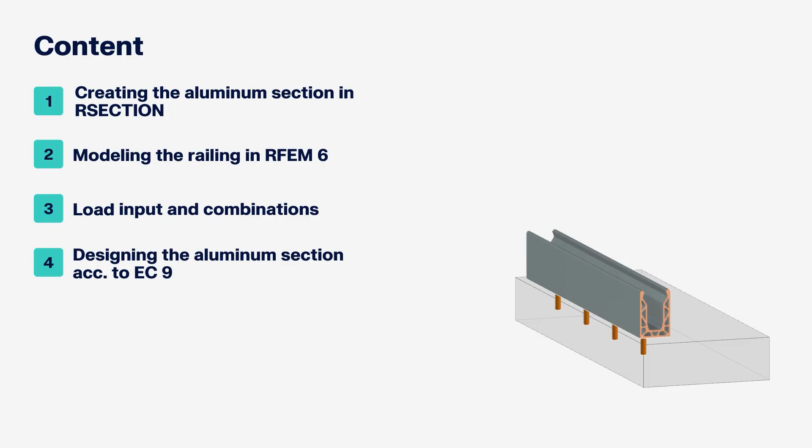The focus is on an aluminum base profile. This profile is anchored to a supporting surface with screws. The glass panel is fixed in place using clamps within the base profile. Step by step, I will demonstrate how to model the system in RSECTION and RFEM and how to design it using the Aluminum Design add-on.

I'll compare two different modeling approaches, one using members and the other using surfaces. The goal is not only to show you how the software works, but also to highlight how the modeling approach influences the structural behavior and ultimately the design results.

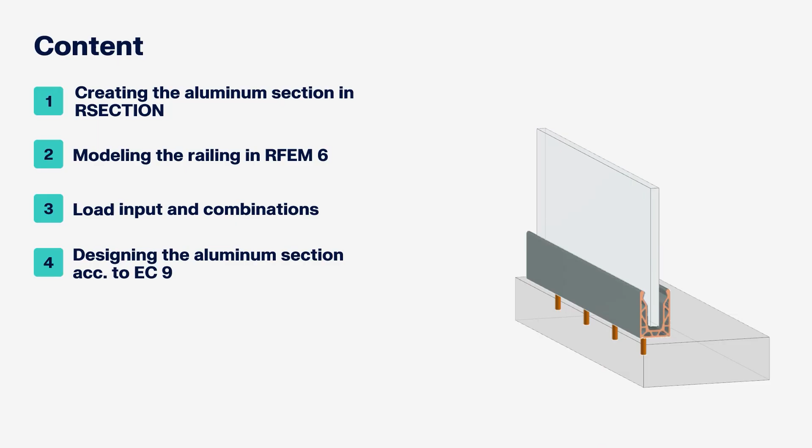Cross-sections in RSECTION can be created in various ways: via graphical or tabular input, by importing a DXF file, using a script, or the API. In this webinar, I will show how to create a cross-section using a DXF file. To do so, I open the import dialog via import DXF, and then I choose the corresponding DXF file.

Three import methods are available, with the create DXF template for further editing. The lines in the DXF file are imported as simple lines. These can be used as modeling aids. The other import options automatically generate elements. These are required for section classification, effective cross-section calculation, and thin-walled analysis. They are also necessary if the section will later be converted to a surface model in RFEM, as only elements are converted into surfaces. The surface thickness corresponds to the element thickness.

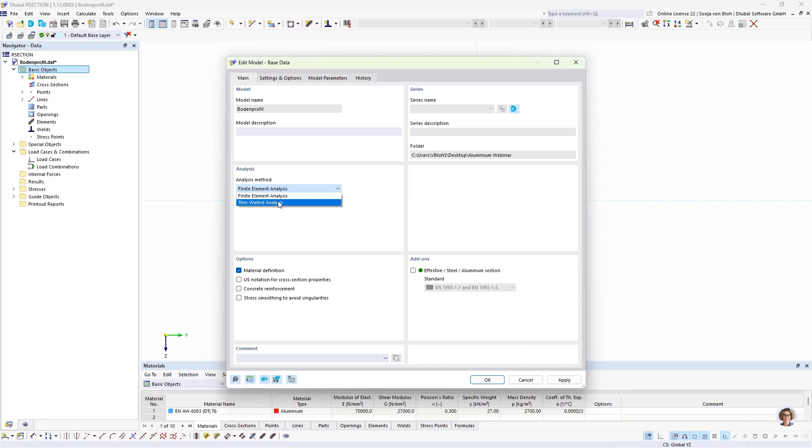In the base data, I select the analysis method. Two options are available: finite element analysis and thin-walled analysis. I opt for finite element analysis.

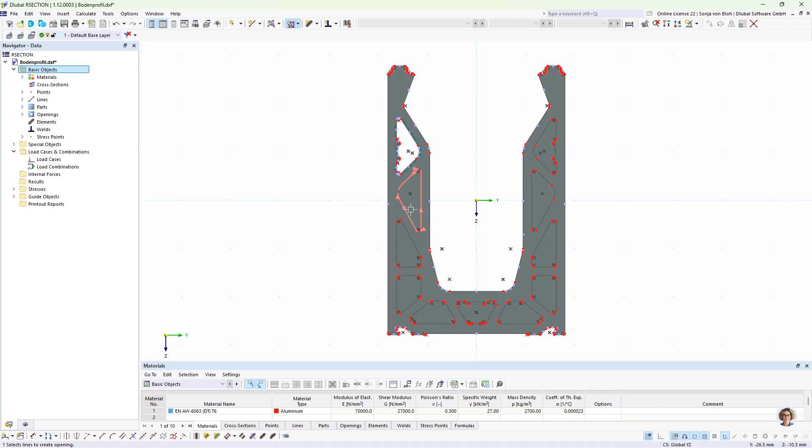Next, I create the part which is required for all analysis methods in RSECTION. Using the select boundary function, I select an outer contour of the cross-section, and then the part is generated automatically. I then define an opening using also the select boundary function, and then I click on the corresponding lines to create the openings.

To improve clarity, I hide the parts and the openings in the display navigator.

Next, I create elements. This is necessary for cross-section classification and to use the conversion to surfaces. Since the section is symmetrical about the z-axis, I model only half of it and create the other half using mirror. I generate elements with the function create center elements between parallel lines. Only two parallel lines need to be selected, and then the element is created automatically. Its thickness is derived from the spacing between the lines. I will do this for all elements now.

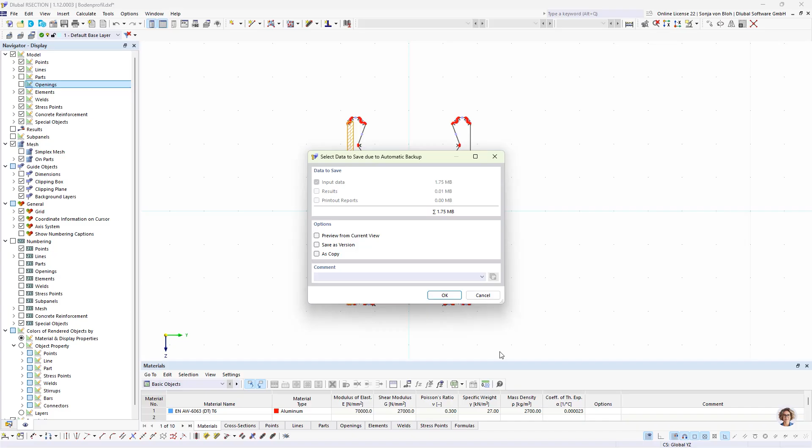Afterwards, I extend the horizontal and vertical elements on both sides. For this, I select first the horizontal elements and then the vertical elements, and I use the function to next line or element. Here I extend both element sides. I do the same for the diagonal elements, selecting first the elements which I want to extend.

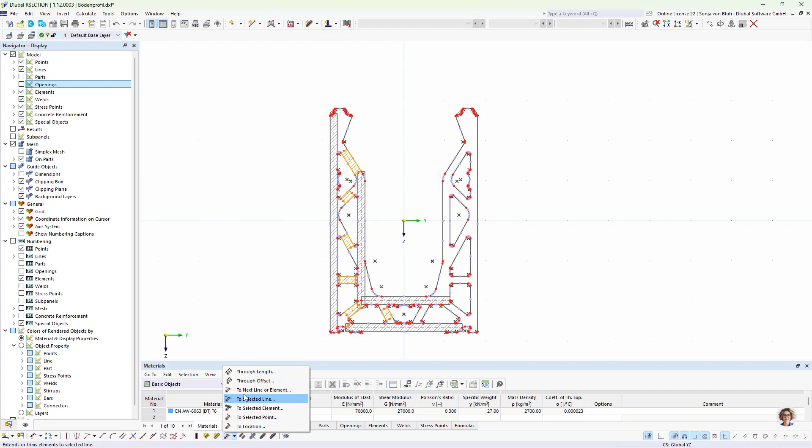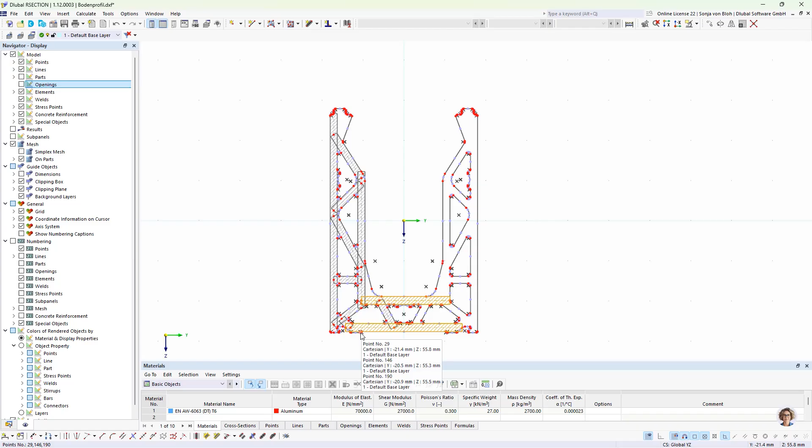And then I choose again this function to next line or element, and I modify both element sides. Since I only want to model half the profile, I shorten the horizontal elements, by setting the y coordinate of the 2 points that you see here to the 0 point.

The elements are not yet connected. To do this, I use the connected lines and elements function, and I select the entire cross-section using a selection window. I delete 2 redundant elements, here this element, this. Then I select all elements.

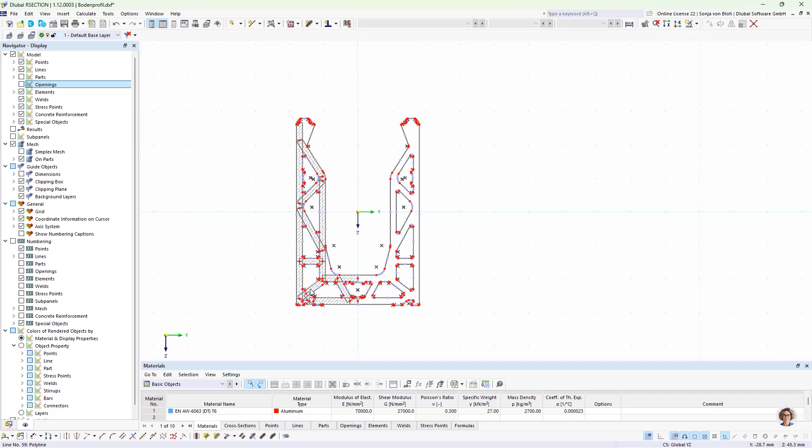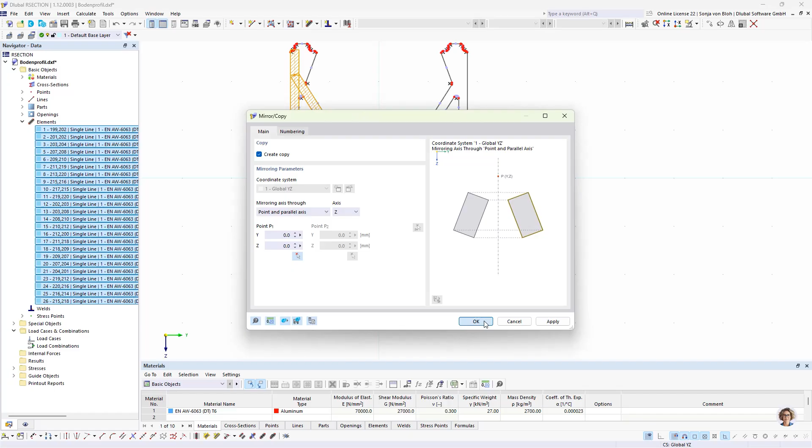And choose now the mirror function. I want to create a copy. Mirroring axis is the z-axis and the point is the 0 point. Now the cross-section is complete, so I can save this cross-section.

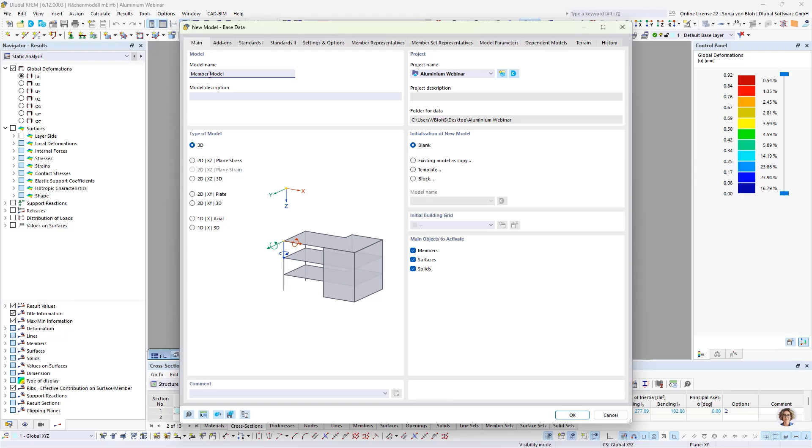And then I move on to modeling the railing in RFEM. First, I show the creation of the base profile as a member with a glass pane rigidly attached. I create a new model via File, New, and I name this model Member Model. I select the type of model 3D.

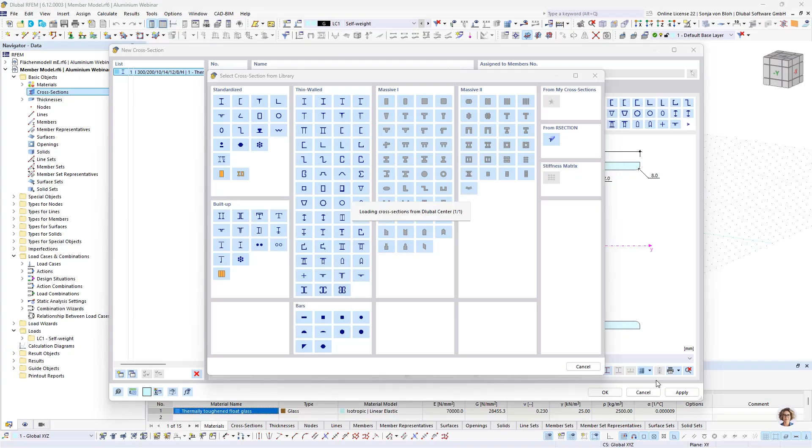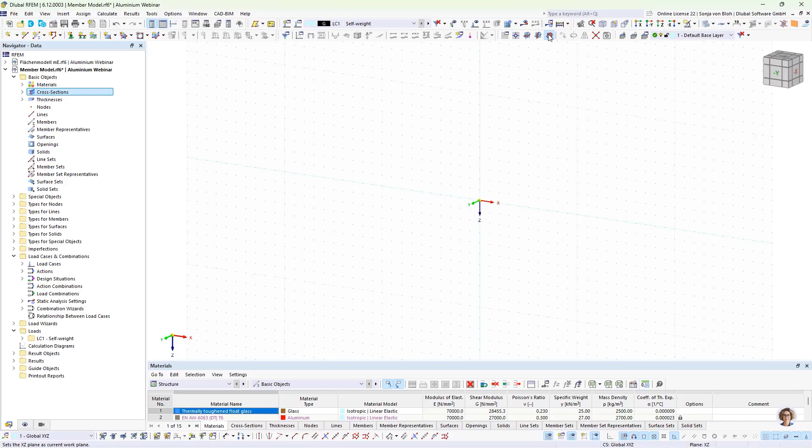I then import the aluminum profile via New Cross-Section. I open here the cross-section library from RSECTION, and then I choose here this base profile. The material defined in RSECTION is retained. I set the work plane to XZ and enable the view in negative Y direction to simplify modeling.

The member is created using this function single general. Here I choose this R section, cross section, and I use the input mode length and direction. Here I define an angle of work plane of 90 degrees and a member length of 1200 millimeter.

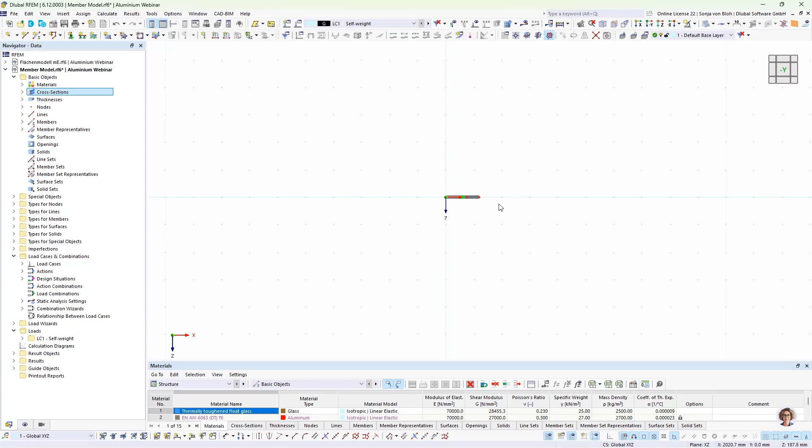Now I create the glass panel. I select the member line and use then this function move copy. Here I want to create a copy. I define a displacement vector in negative z direction about 900 millimeter, and then I activate the step links option and link lines with surfaces to automatically create the surface.

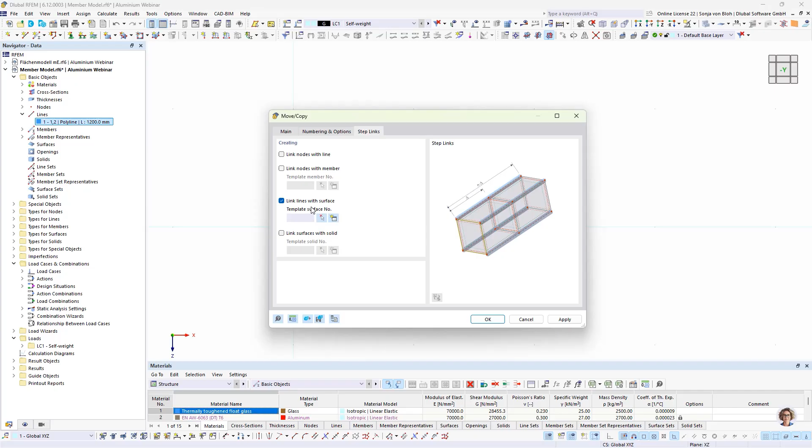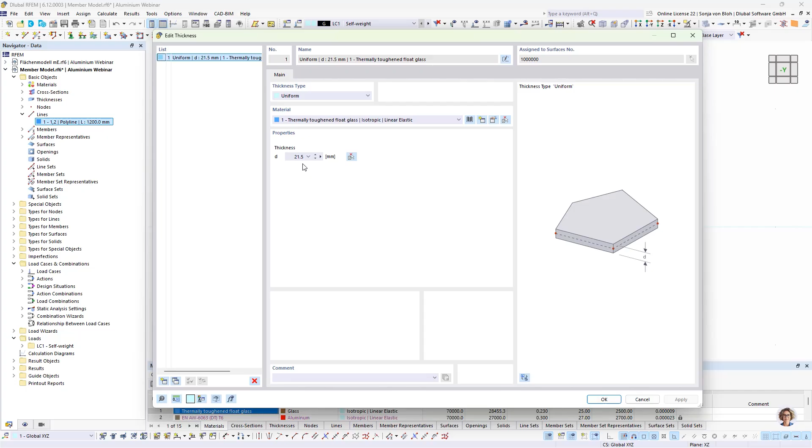For the glass surface, I create a new material, or I have already created it. It's a material thermally toughened float glass with a thickness of 21.5 millimeter. Then I click here on OK, and the glass is created.

With the glass design add-on, it would be possible to define the detailed layer structure of the glass. However, since this webinar focuses only on the aluminum base profile design, I skip this step.

At the location where the base profile is anchored to the floor, I create nodes. For this, I open the Edit Member dialog, and I use the option Nodes on Member to place nodes without splitting the member. The first screw is placed 100 millimeter from the start. 5 more screws follow at 200 millimeter intervals.

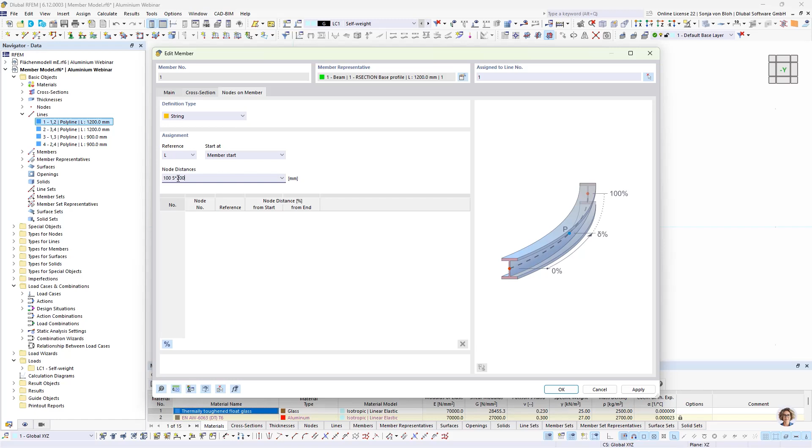I define the node distances in the tab Nodes on Member, and I use the definition type string. Then I switch here to absolute distance, and now I enter 100, space, 5 multiplied by 200. First the initial distance, then 5 repetitions of 200 millimeters.

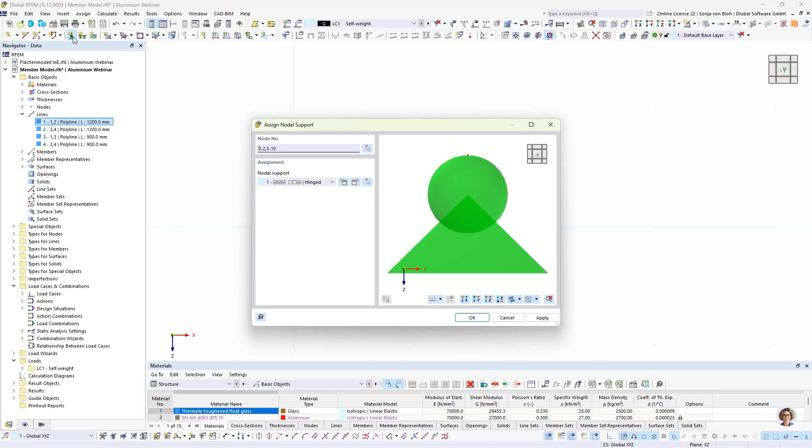I assign now on these nodes the supports. For this purpose, I select first the nodes, and then I assign nodal supports. Here I create a new nodal support. I don't need these nodal supports, so I delete them.

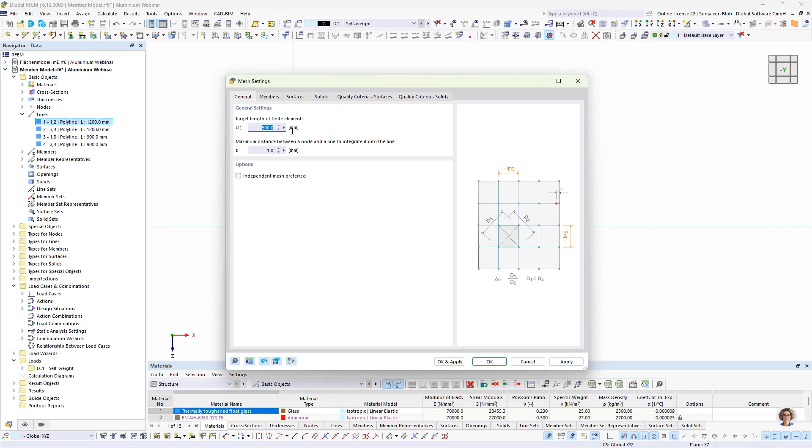Then I adjust the FE mesh in the mesh settings. And I want to define a target length of 50 millimeter.

Next, I define the loads. The load case self-weight is already created as a load case. The checkbox active self-weight is enabled so that the self-weight is generated automatically. I create a new load case named transom loads for the transom loads. And I assign the load category imposed loads.

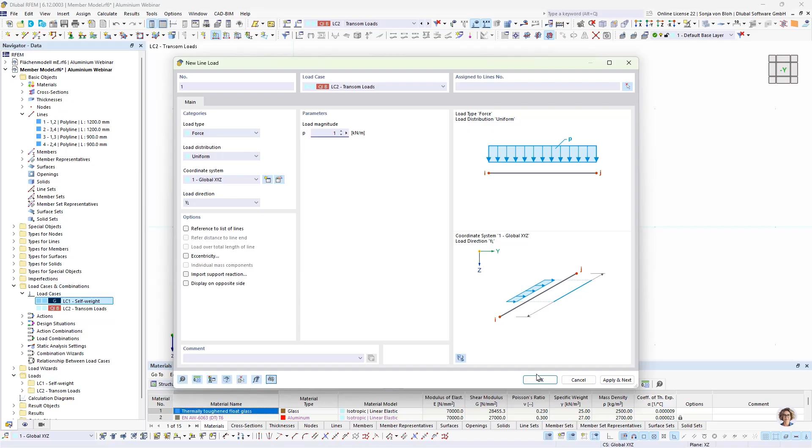In this load case, I define a line load, in load direction Y, and with a load magnitude of 1 kilonewton per meter. And I apply this load to the top edge of the glass panel.

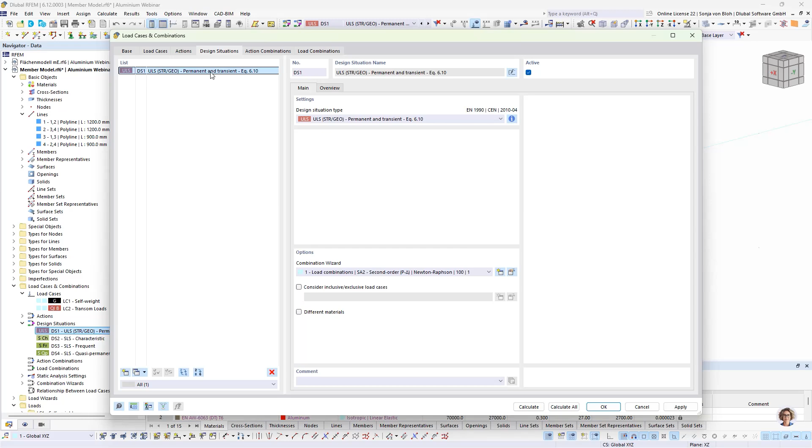Only ultimate limit state checks are performed. So I open here the design situations. I delete all serviceability limit state design situations, because I only want to do ultimate limit state designs.

The railing and loads are now fully defined. Next, I activate the aluminum design add-on in the base data. In the ultimate limit state configuration, I deactivate the stability designs because I only want to do cross-section checks.

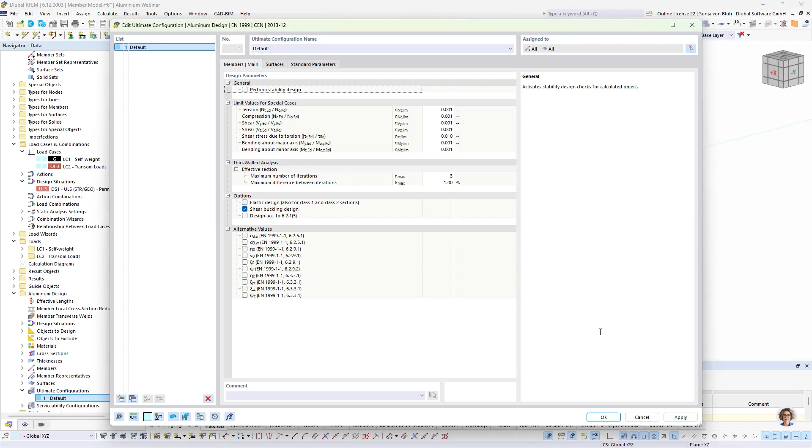Then I switch to the aluminum design tables. I only want to design member number 1. Now I start the calculation.

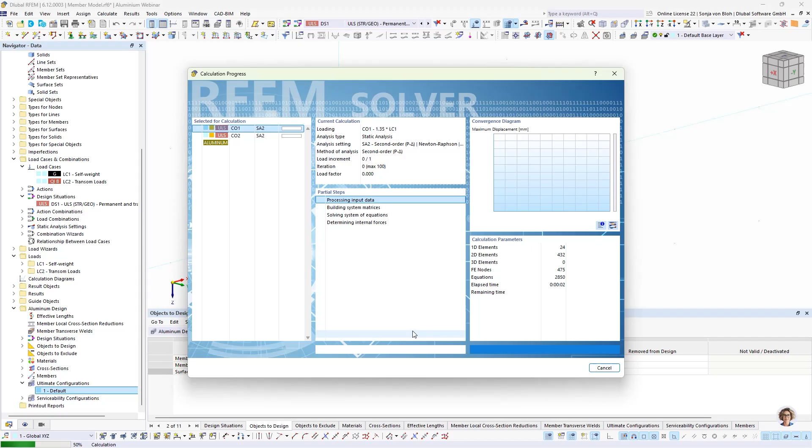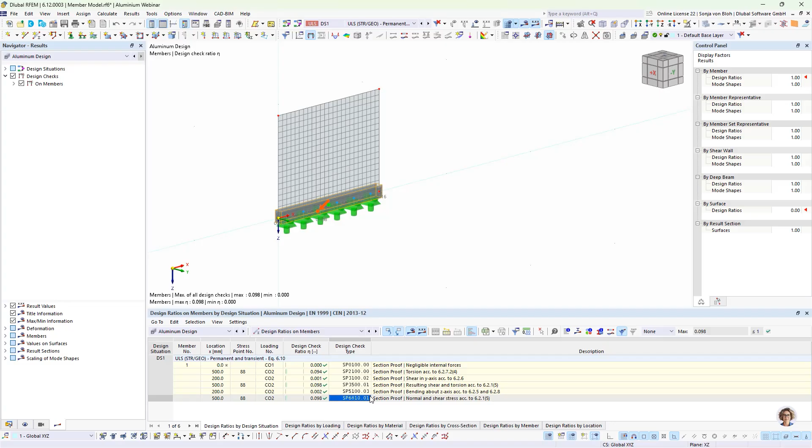The results show a very low utilization of the profile. This is expected as the member model can only represent idealized loading. Local effects like point loads from clamps pressing on the web of the cross-section are not captured and therefore not included in the design. To consider such effects, a more detailed surface or solid model is required.

Now I want to show you how such a surface model is built. So I save this file and I use the previously created member model and save it as surface model.

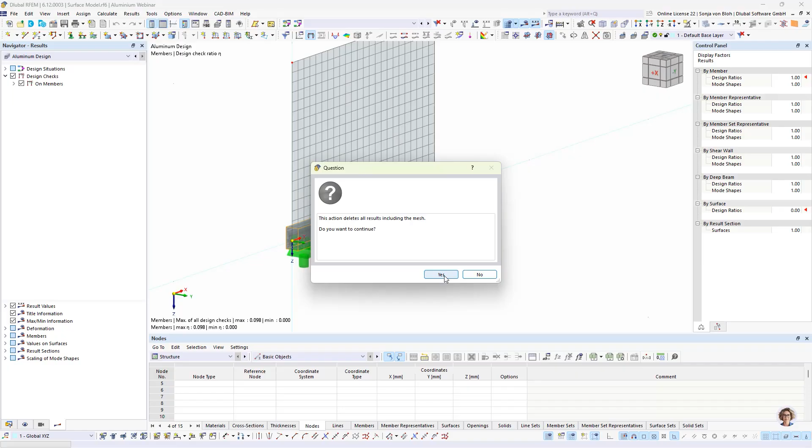I then convert the member into surfaces using the function generate surfaces from members. The elements defined in our section are automatically converted into surfaces with the corresponding thicknesses. I open such a surface here, and you see that the thickness of the surface corresponds to the thickness of the element.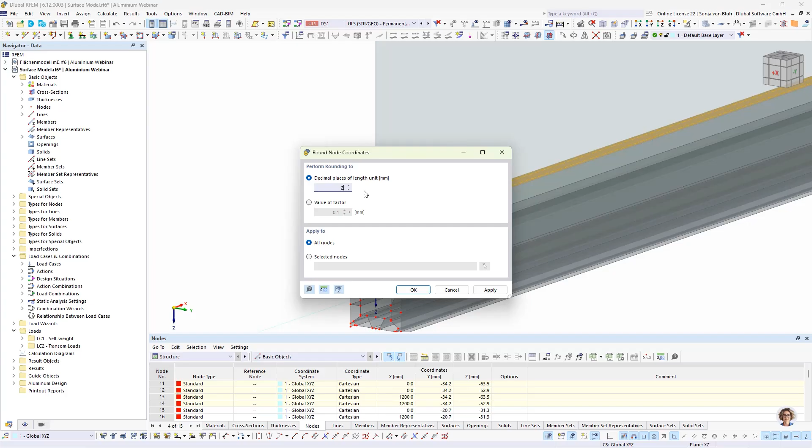I round node coordinates now to 2 decimal places to eliminate inaccuracies. Next, I move the glass panel to its real installation position using the move function. Here I define the displacement vector by picking these nodes. The displacement should only be in Z direction.

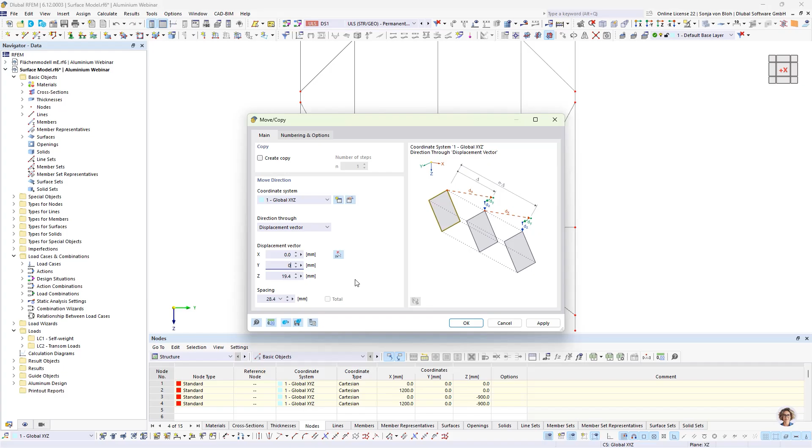In the 2 bottom surfaces that I now select, I create openings for the screws. As the openings span multiple surfaces, I merge them into single surfaces by deleting unnecessary ones and redefining the surface boundaries. So I delete now the unnecessary surfaces, and then I modify the surface. Here I choose the boundary lines of the whole surface. Same for the bottom surface.

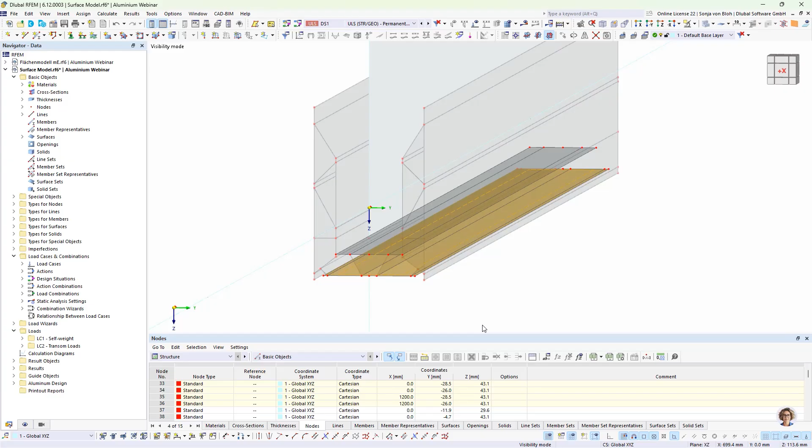The center of the first screw hole is located 100 millimeter from the beginning of the base profile. The screw holes are spaced at intervals of 200 millimeter to create the center points of the first hole. I copy these center nodes in X direction with a displacement vector of 100 millimeter.

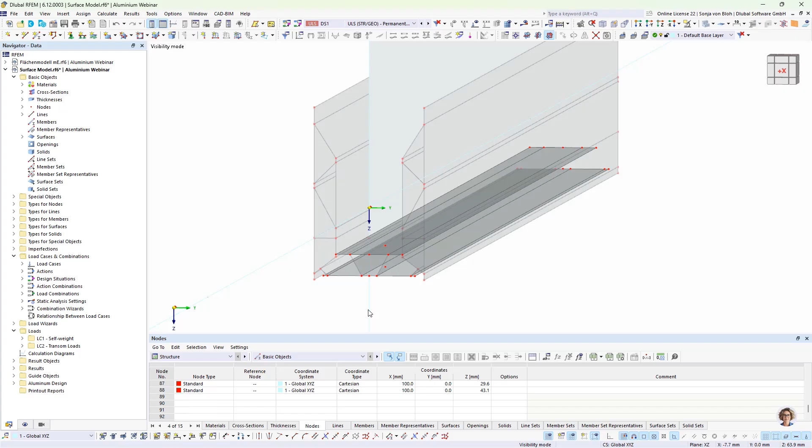Then I activate the work plane XY, and now I create the openings on the lower surface. The openings have a radius of 7.5 millimeter, and on the top surface they have a radius of 14 millimeter.

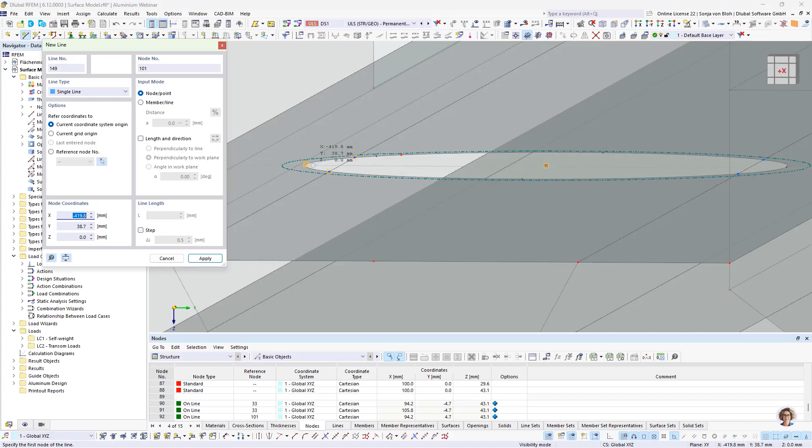The diagonal plates also require openings at these positions. I define boundary lines for them. So I create now the boundary lines for the openings.

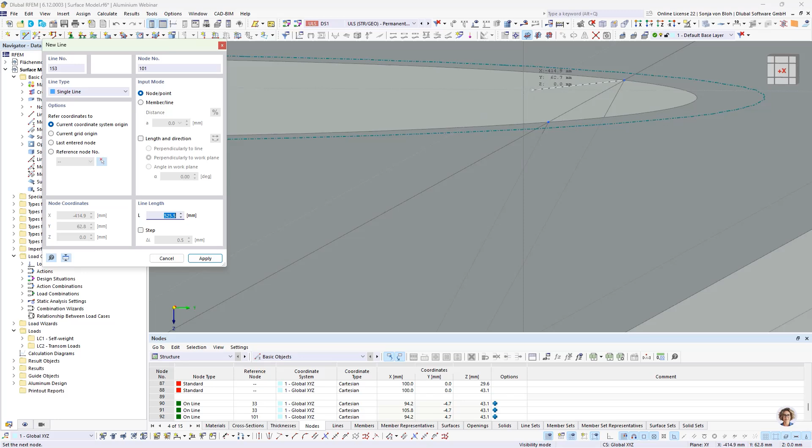I then copy these lines and also the openings 5 times in X direction with a displacement vector of 200 millimeter.

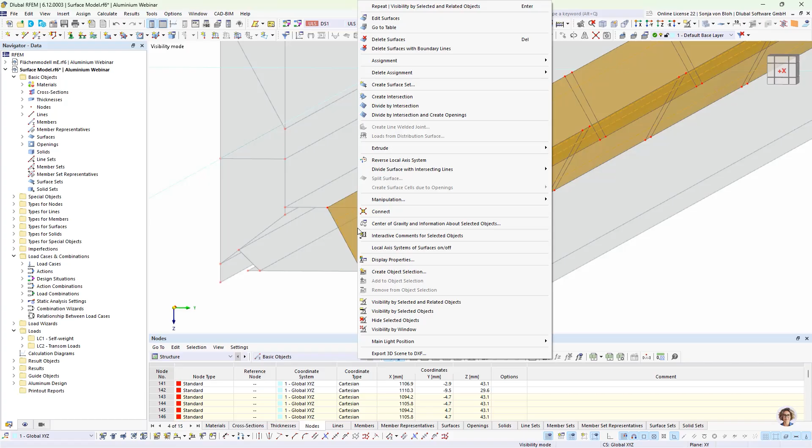Then I split the diagonal plates. To do this, I first select the diagonal plates, and then I use the function divide surface with intersecting lines. Then all I have to do is to remove the openings.

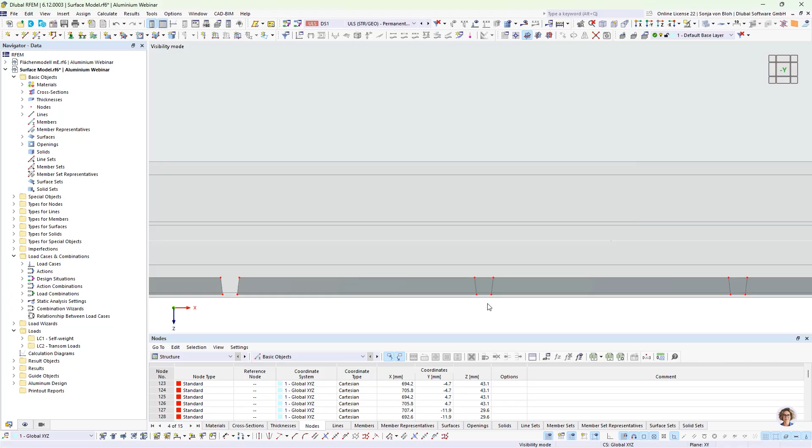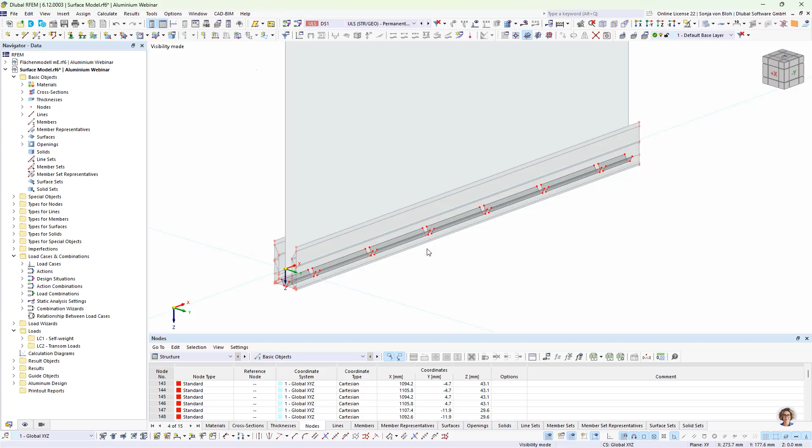In the next step, I define the contact between glass and my clamps. The glass pane is fixed at the top and bottom edges using clamps, here on this top edge and this bottom edge.

The contact between the glass pane and the base profile is modeled using surface contact. For this purpose, the relevant surfaces are divided according to the spacing of the clamps.

Each clamp is 80 millimeter wide and positioned 80 millimeter from the start of the base profile. The distance between the clamps is 160 millimeter.

To model this, I copy the 4 edge lines 14 times in X direction with a displacement vector of 80 millimeter.

I then divide the surfaces along all intersecting lines. For this purpose, I first select the surfaces and then I use the function divide surface with intersecting lines.

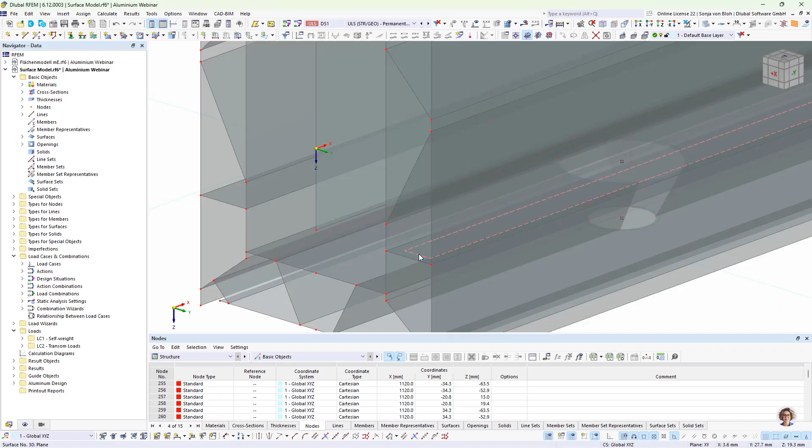To do this, I first define a visibility. I select the corresponding surfaces and then I define the surface contact.

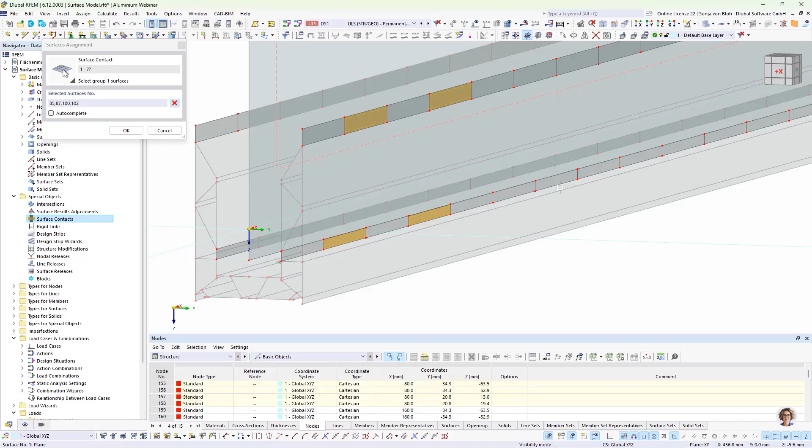In group 1, I choose all the surfaces where the clamps are located, because we have only a contact between clamp, or a contact at the clamp position between glass and my webs of my base profile.

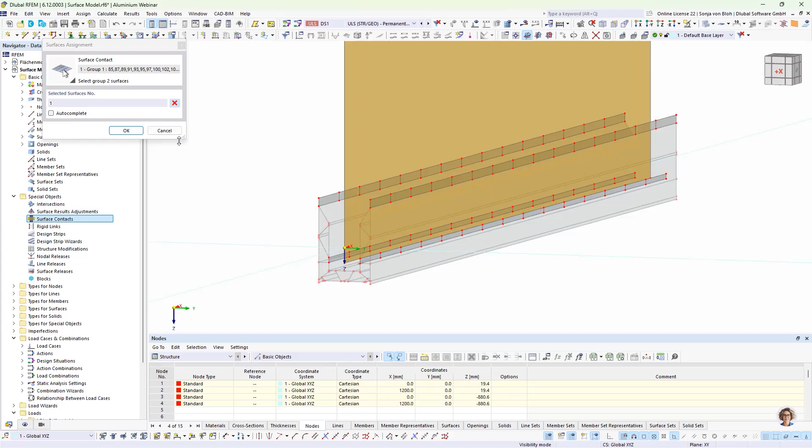Surface number 1 is my glass pane. Then I have to define the surface contact. Contact perpendicular to surfaces fails under tension. Then I want to consider also a contact parallel to surfaces with a little shear stiffness.

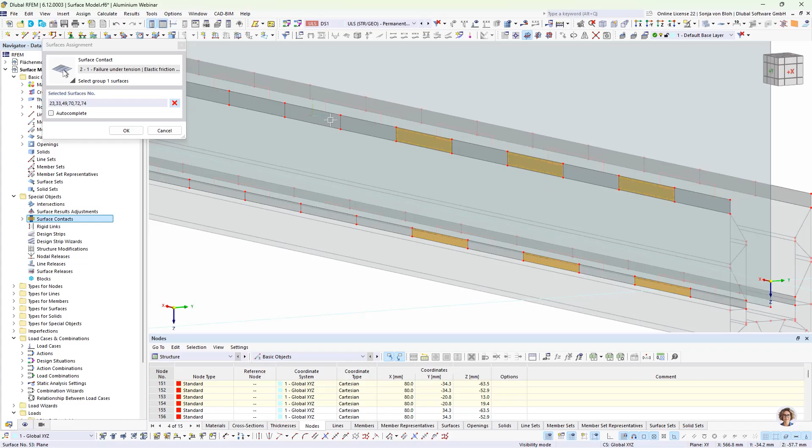I have to define this on the other side too. So I create a new surface contact. Then I choose the corresponding surfaces where the clamps are located, and then the glass pane.

At the clamp positions, the glass pane can bear on the base profile. These contact conditions are modeled using rigid links between the lower edge of the glass pane and the surface of the base profile. In some cases, screw holes are located within the contact zones of the base profile surface.

Since rigid links can only be defined where no openings exist, I split the line at the bottom edge of the glass pane in the areas of the openings. The rigid links are then only applied in the segments of the clamps that are outside the openings.

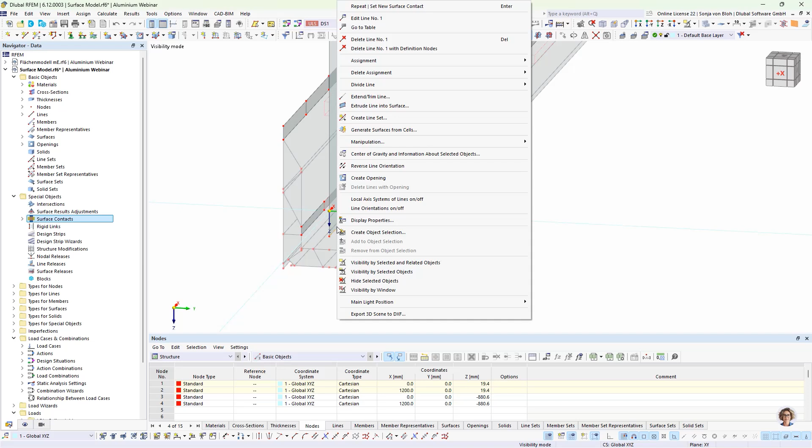I first divide the lower edge of the glass pane into 15 segments of 80 millimeter each. For this, I use the divide line function.

I then copy the arcs of the first 2 and last 2 openings to the elevation of the lower glass edge. The other clamps are located outside the screw openings.

For this purpose, I use a visibility, and here I choose the arcs of the first two openings and of the last two openings.

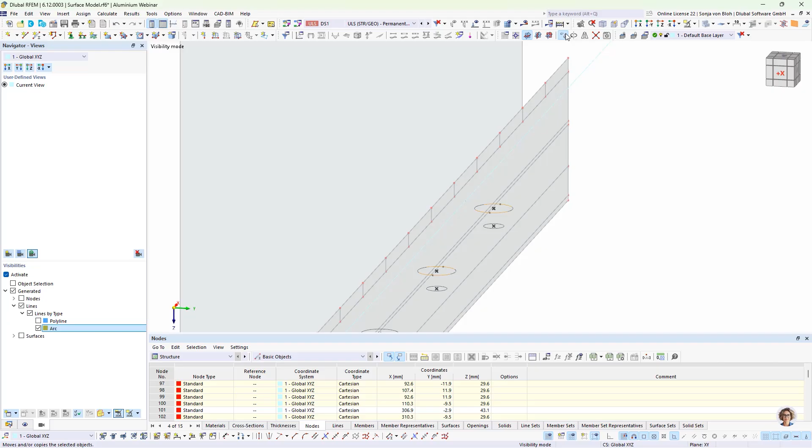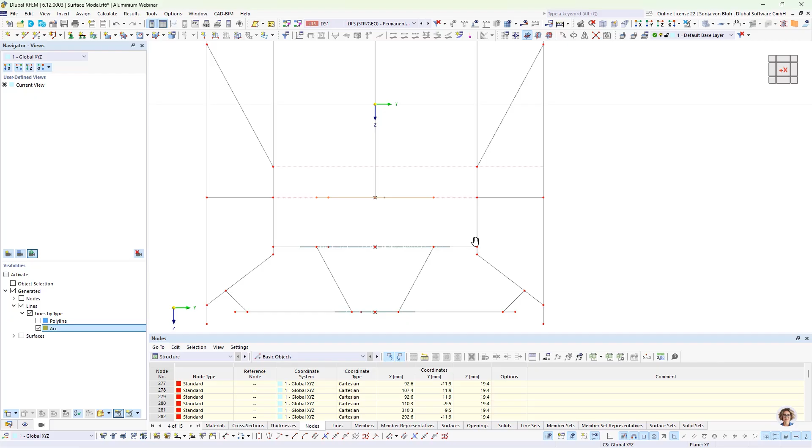Then I copy these arcs to the lower glass pane, and then I use the connect function to define the nodes on the intersecting points.

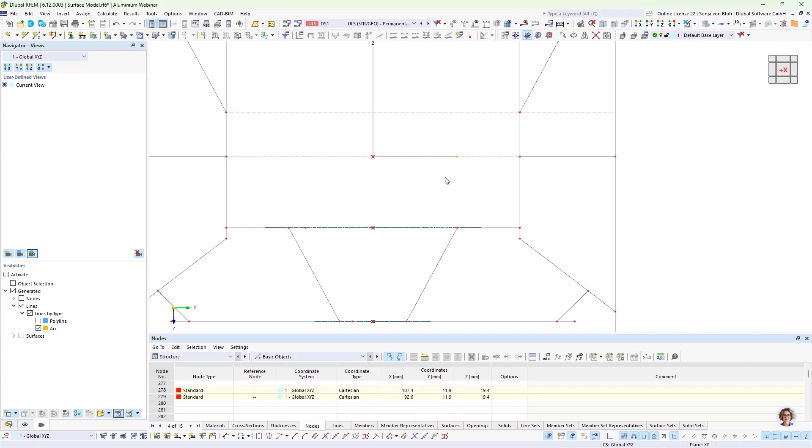I don't need the arcs anymore, so I delete them. Then I can create my rigid links.

For this purpose, I define a visibility. And now I define the rigid links. You find them here in the special objects. I create a new rigid link.

I want to define a rigid link line to a surface. Then I have to define a line hinge where I activate the hinge in uz.

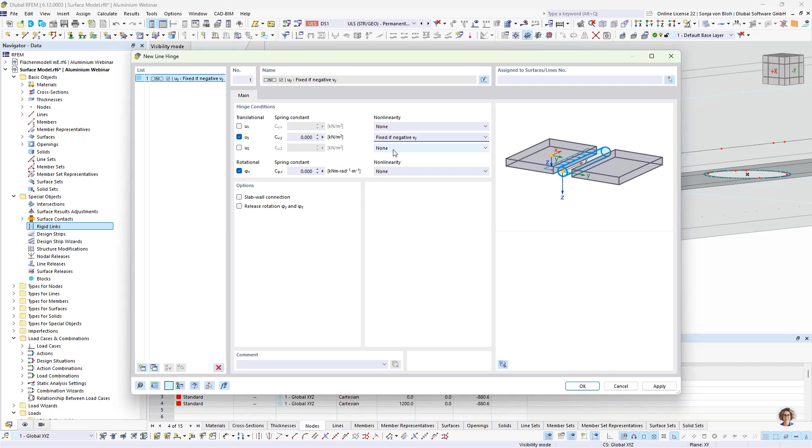Then I pick the line and the surface.

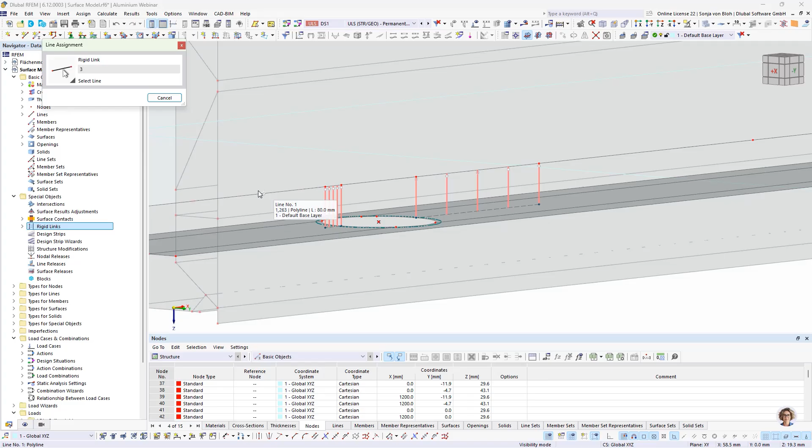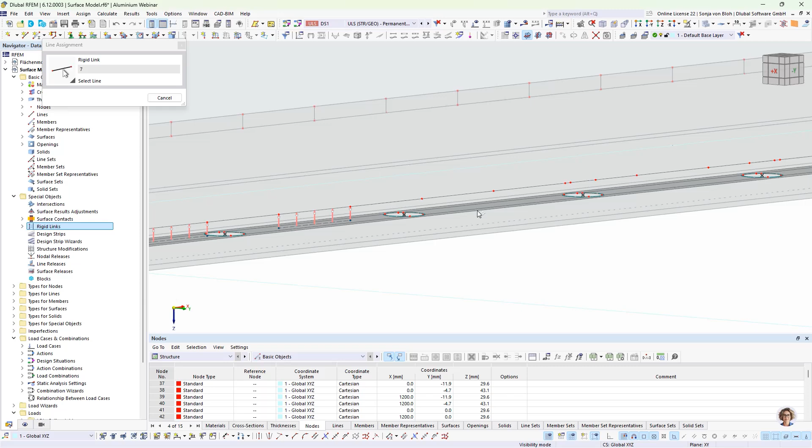I will do the step, and now the last clamp.

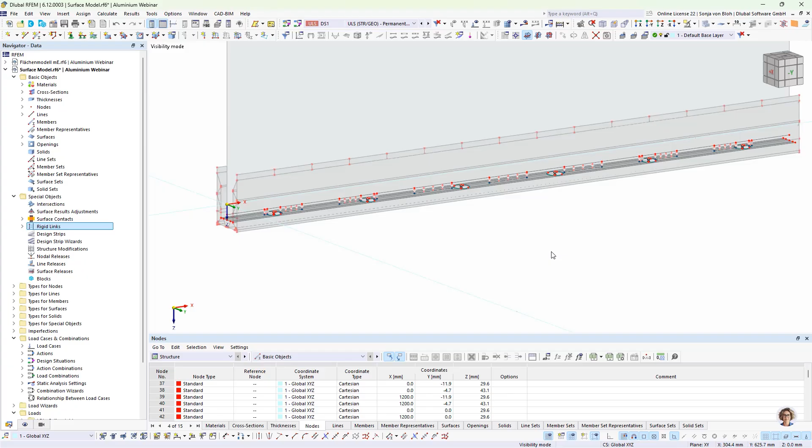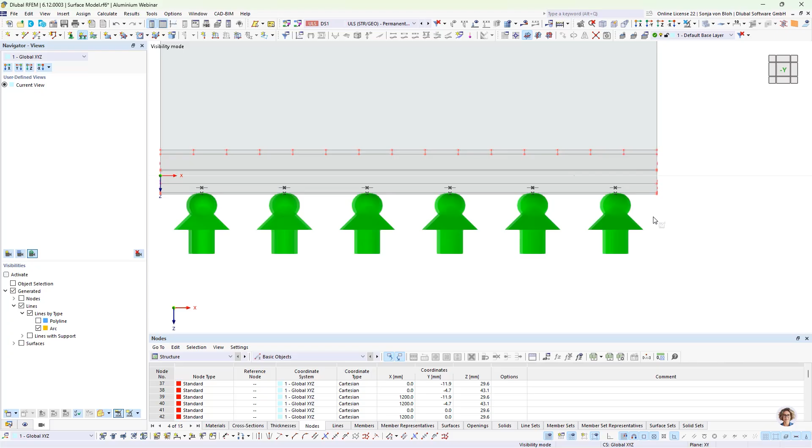The support provided by the screws is modeled at the openings using hinged line supports. I will do this afterwards, using also the visibility of the arcs. And here I create a hinged line support on these openings.

The base profile itself rests on the substrate. This support is modeled using a surface support with failure and tension, meaning the support becomes ineffective when the contact stress in the Z direction is negative.

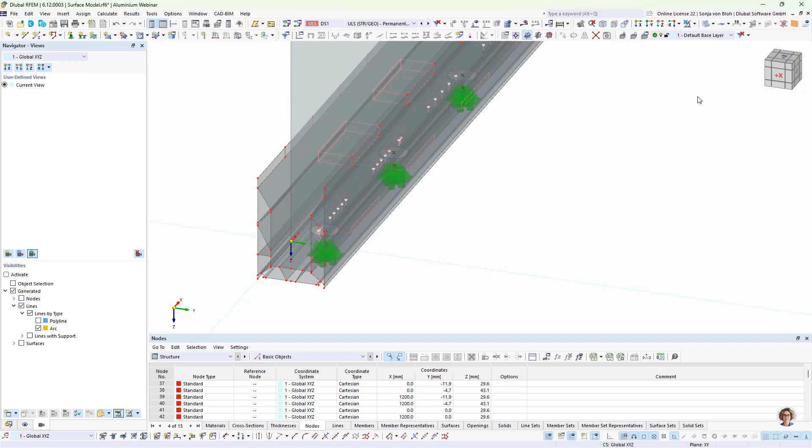I will do this now. So I select the surfaces of the base plate, and then I assign surface support in Z direction with nonlinearity failure if negative contact stress.

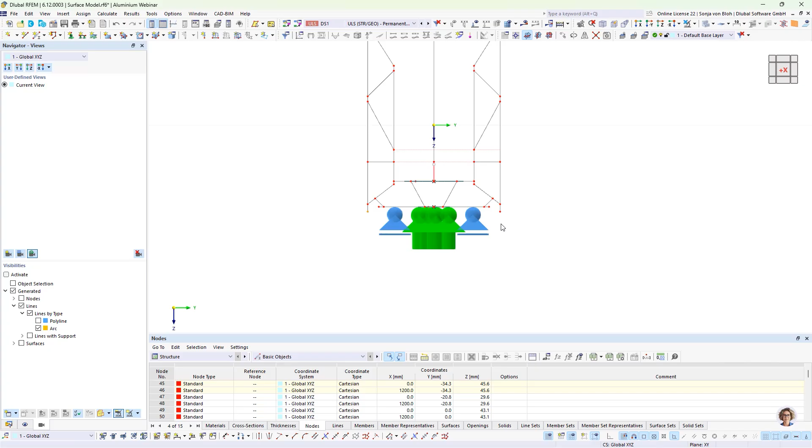Additionally, the edges of the base profile are supported by line supports, also with the condition failure if PZ is negative, so that these supports are only active in compression. For this, I select the two lines and create a new line support with support condition nonlinearity failure if negative PZ.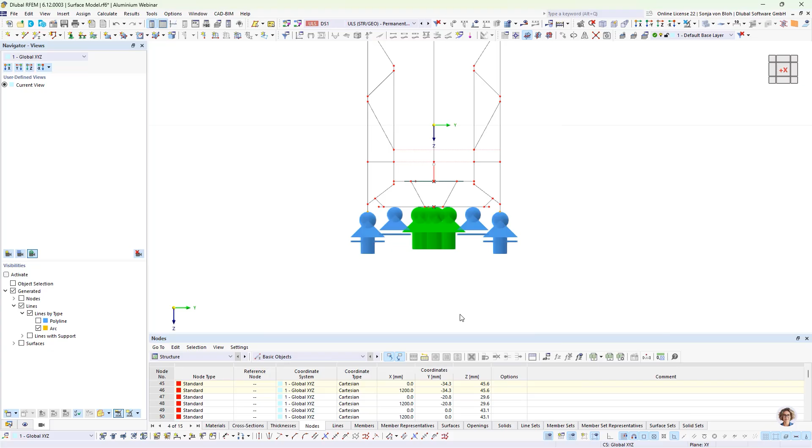Next, I define the FE mesh. I assign a surface mesh refinement to all surfaces of the base profile with a target element size of 4 millimeter. So I select all surfaces, edit them, activate the mesh refinement, and assign a mesh refinement with a target length of 4 millimeter to all of these surfaces.

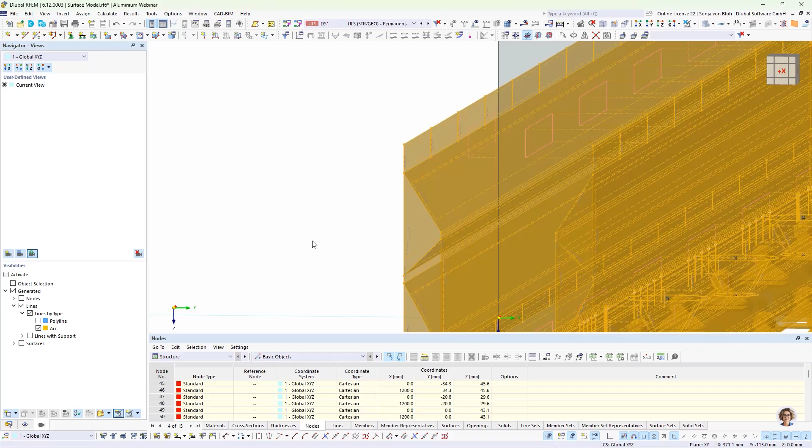In addition, I define a circular nodal mesh refinement at the center of the bottom opening. So at this point, I edit this node, activate the mesh refinement, and define here a radius of 20 millimeter. Inner target FE length should be 1 millimeter and outer target FE length should be 2 millimeter.

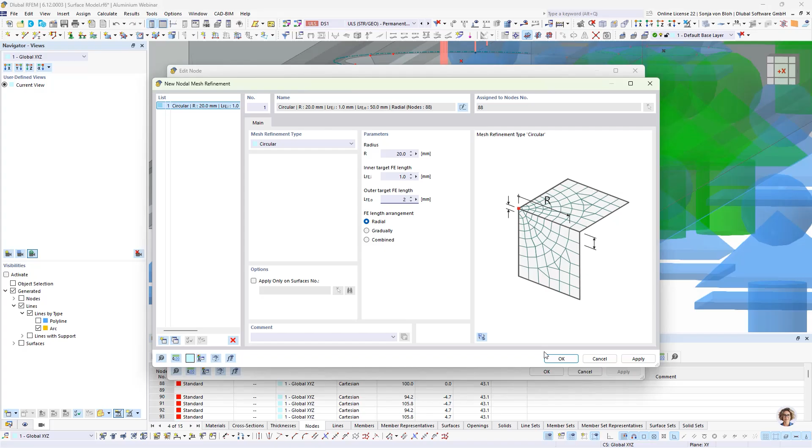I then copy this mesh refinement via move copy function 5 times with displacement vector in X of 200 millimeter.

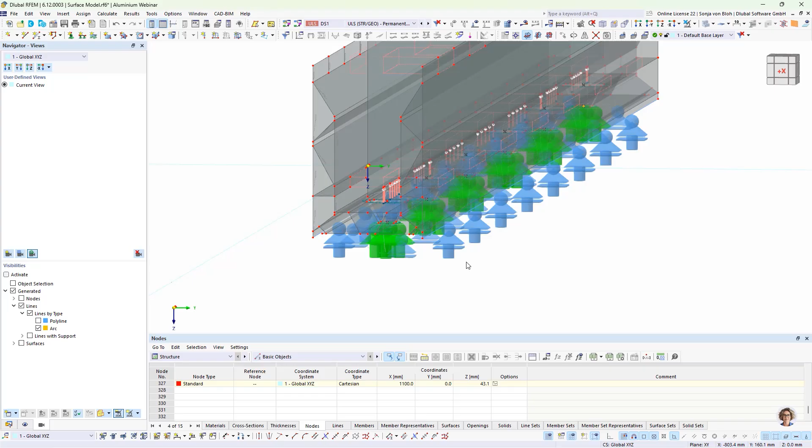In the next step, I configure the aluminum design settings. For the design, I select on the table objects to design all surfaces of the base profile. No further settings are required.

Since I already performed the calculation in advance, I now open the pre-calculated file.

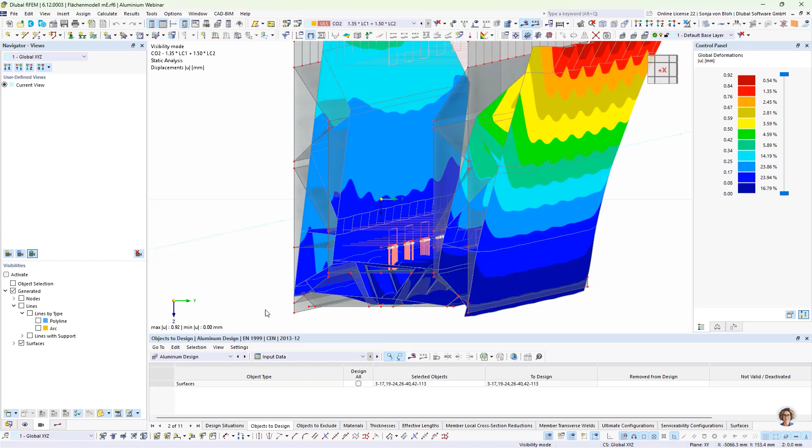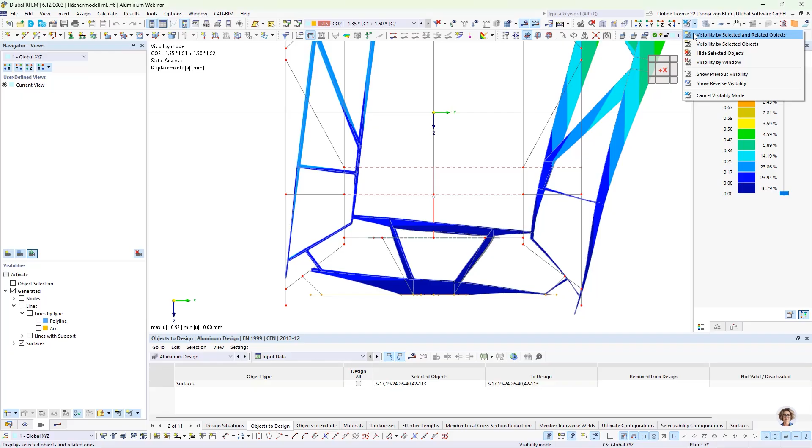The deformation clearly reveals the upward bending of the floor profile. They also illustrate the lifting of the cross-section from the substrate and the restraint provided by the screws. So I will show you only the surface where we can see the deformation of the base plate.

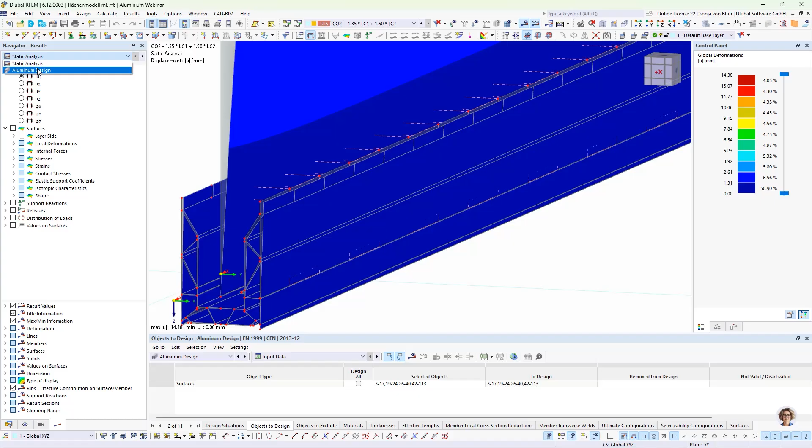These effects cannot be captured with a simple member model. Then I switch to the design results, the aluminum design. And here you can see that the design results also confirm that the surface model leads to significantly higher utilization of the base profile compared to the member model.

Local stress concentrations occur particularly in the areas around the screw holes and in the lower web region. So I show you this now.

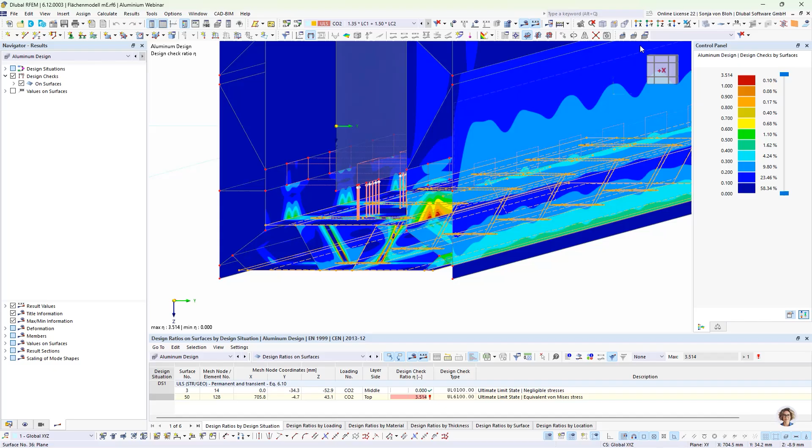These zones here have a greater material thickness. However, for the purpose of this calculation, I used a reduced thickness to obtain conservative results. It would therefore be advisable to model the component thickness in more detail in these areas in order to achieve more realistic design results. This concludes the key differences between the member and surface models.